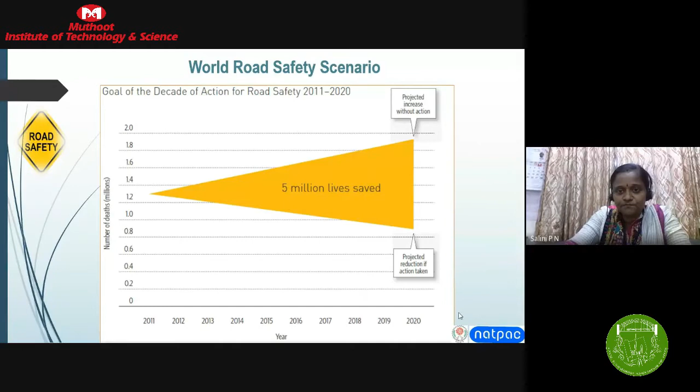The safe system approach is a new idea conceived by global practitioners in the field of road safety, and 2011 to 2020 has been considered the decade of action for road safety. The 5 pillars for the safe system approach have been identified as road safety management, building safer roads, building safer vehicles, safe user behavior, and improving post-crash care. So all intervention strategies worldwide have been structured to achieve improvements in these 5 areas, identified as the 5 pillars for achieving a safe system approach.

About 2.3% of all deaths happening worldwide are due to road traffic crashes. Most of the lives lost are in the age group of 15 to 29, so youngsters are losing their lives on our roads. Road traffic injuries were the 9th cause of total deaths earlier, but it has now become the 3rd leading cause, showing the alarming nature of this serious concern.

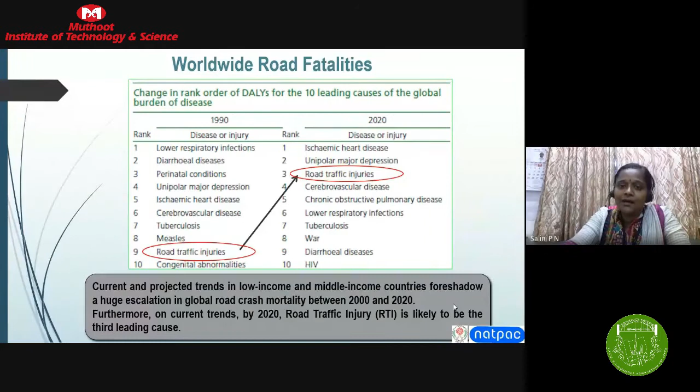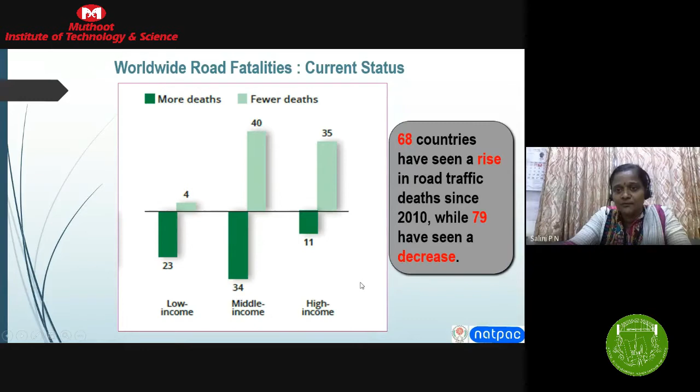It is found that the loss of lives happening on our roads is even more than the loss of life due to COVID. When we look at the statistics, it's found that almost 68 countries have seen a rise in road traffic deaths, while about 79 countries have seen some decrease because of the safe system approach they have adopted and the interventions they have taken in road engineering. About 1.35 million people are getting killed each year on our roads.

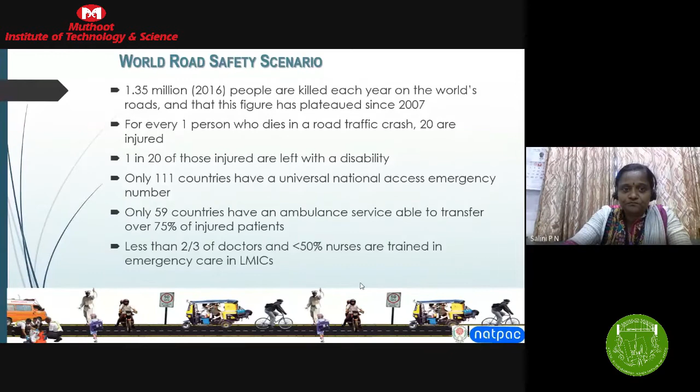Overspeeding is found to be one of the major reasons for the cause of crashes and deaths on our roads.

Coming to the Indian scenario, about 8 to 10% of global road deaths happen in India, and the vehicle population is increasing by almost 20% every year. So Indian cities are getting overwhelmed with the number of vehicles increasing every year.

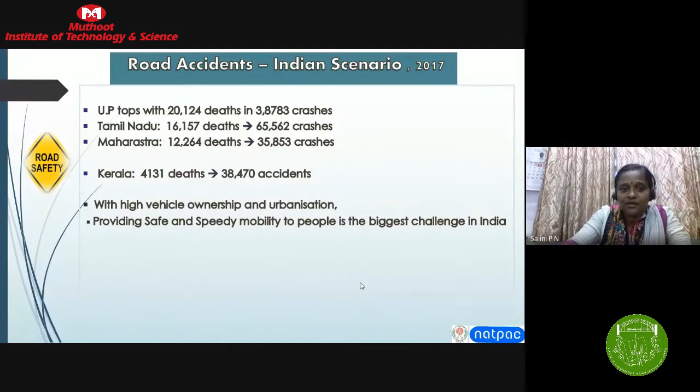When coming to Kerala, more than 4,000 deaths are happening in almost 38,470 accidents every year. The death toll is more than 4,000. Tamil Nadu and Kerala are among the two states in India which have a comparable number of deaths with other developed countries.

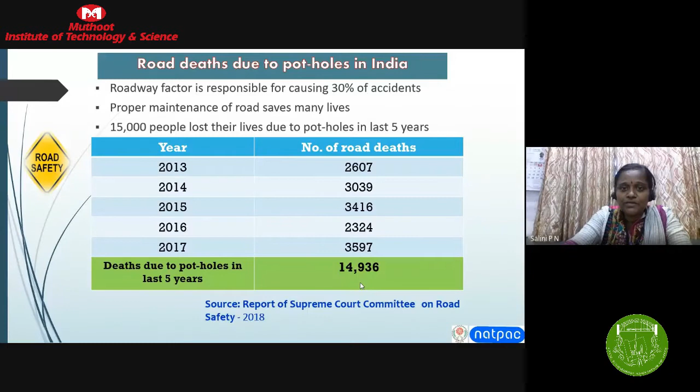The source report submitted to the Supreme Court shows that potholes are causing almost 30% of accidents. The roadway factor responsible is potholes. This implies the role of road engineering, safe road engineering, in reducing the number of accidents as well as the loss of life on roads.

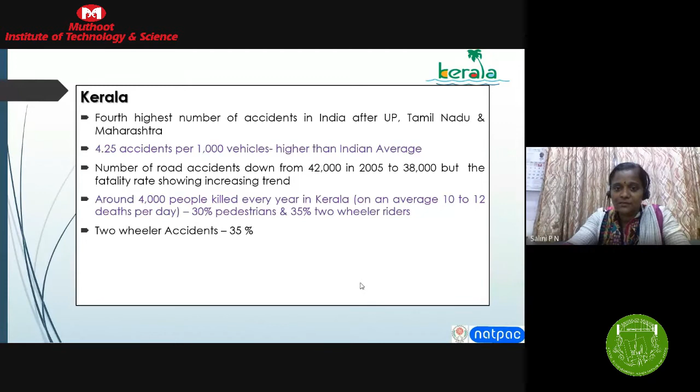About 4.25 accidents per 1,000 vehicles are happening in Kerala, that is about 10 to 12 deaths per day. This is the statistic on which it is reported that about 10 to 12 deaths happen per day. Out of the persons killed, about 30% are pedestrians and 35% are two-wheeler riders.

So they are the vulnerable road users who become victims of most accidents - the two-wheelers and pedestrians. These statistics also show that two-wheelers and pedestrians are the most vulnerable category of road users on our roads, becoming victims of most road accidents, with the most severe fatality rate happening to them.

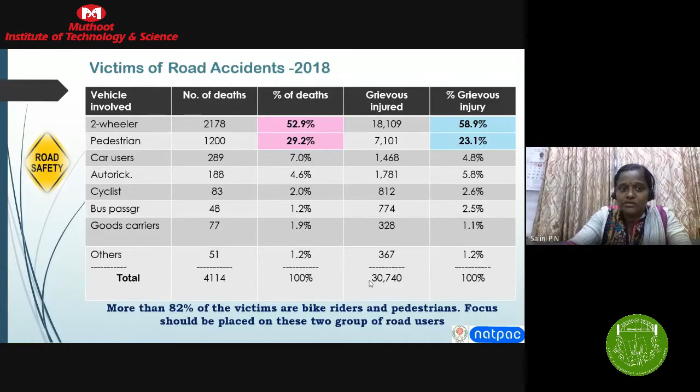More than 82% of the victims are bike riders and pedestrians. This statistic on vehicles involved and corresponding number of deaths shows that grievous injury happens mostly to two-wheelers and pedestrians. This pie chart again shows the severity or extent of fatality caused to two-wheeler riders and pedestrians.

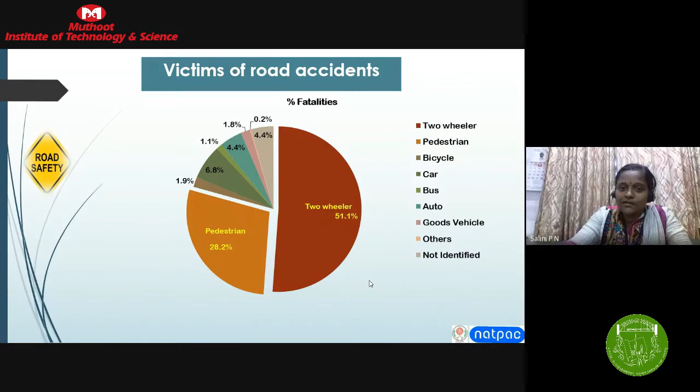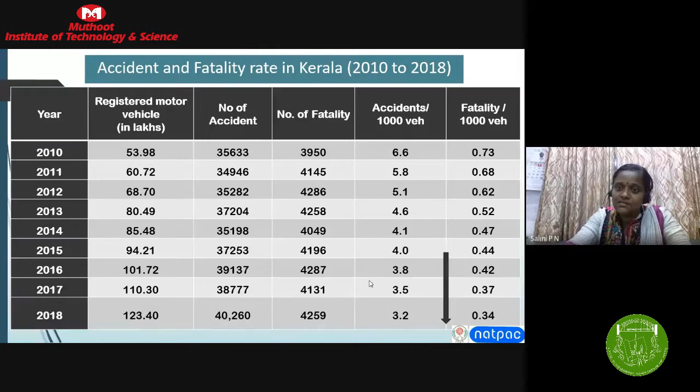Around 95% of road crashes involve some element of human error. Although educating road users can reduce the number of road crashes that occur, human error cannot be eradicated. So there is always a chance for accidents to happen.

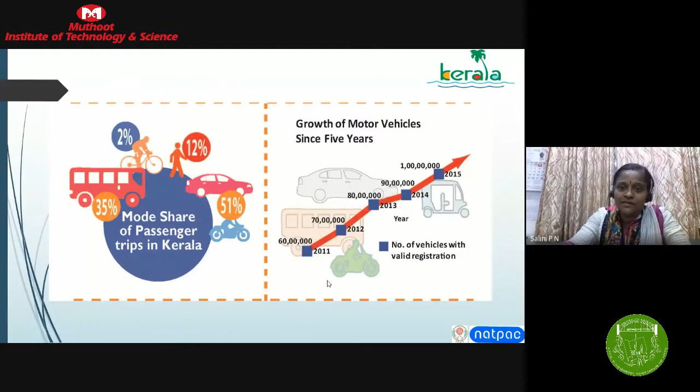Now this is the approach we are taking: to consider and build forgiving roads, because humans always make mistakes that cannot be avoided, but we can make safe engineering in our roads so that mistakes made by humans or road users will be taken care of, or at least the extent of fatality will be lessened.

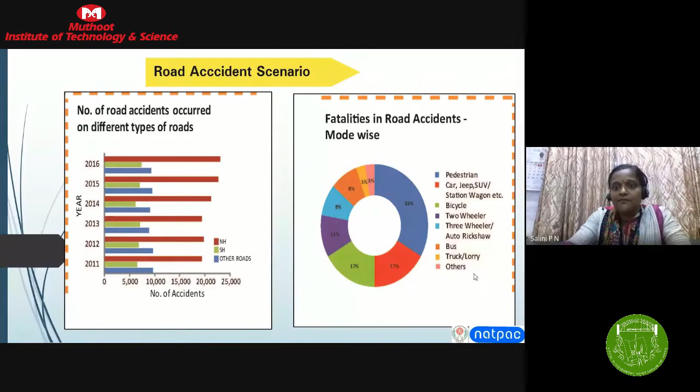The growth of motor vehicles over the years shows a steepening curve, as does the accident scenario. The number of accidents occurred on different types of roads - national highway, state highway, and other roads - are shown here. The accident rate on national highways is higher, and vehicle category-wise fatalities on roads are also shown in the pie chart.

So altogether, all these statistics show there is an alarming rate of accidents happening in Kerala, causing serious concern on our roads. The road-wise accidents show 25% on national highways and 20% on state highways.

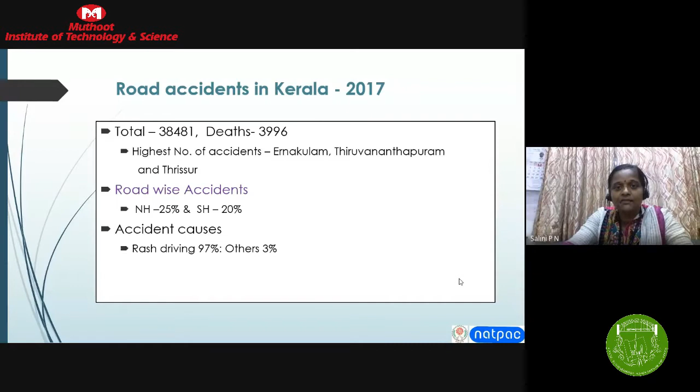So there is an urgent need for all practicing engineers, academicians, and researchers to focus on safe road engineering so that the number of deaths happening on our roads can be lessened.

So these 5 pillars of road safety were identified so that we can make more scientific and judicious engineering on our roads: road safety management, better infrastructure, safe vehicles, road user behavior - better behavior of road users on the road - and post-crash care or trauma care.

And recently, when 2011 to 2020 was declared as the road safety decade, the new idea or concept has been the Vision Zero approach.

Globally, all countries have taken up a decision to bring the number of accidents to zero by 2030. That is the Vision Zero approach. It is stated that it can never be ethically acceptable that people are killed or seriously injured when moving within the road transport system.

So practicing engineers or the highway fraternity have to bring an element of safety engineering onto our roads, so that roads are built as forgiving roads, even if road users make mistakes, that will be taken care of.

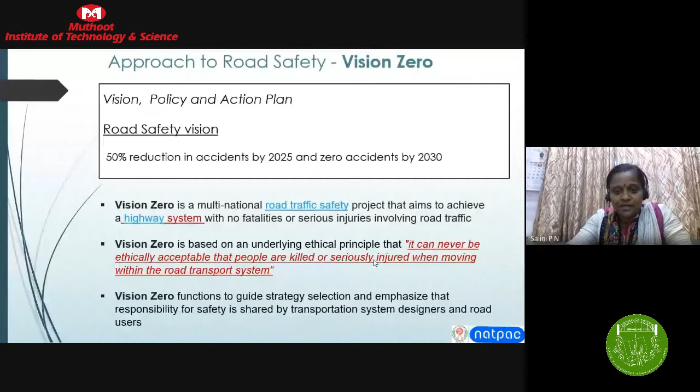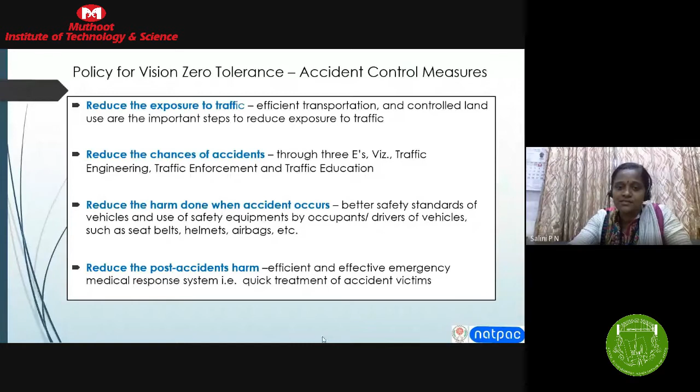Accident control measures should be oriented towards reducing the exposure to traffic, reducing the chances of accidents, and reducing the harm done when an accident occurs. Accidents are always unpredictable - we cannot predict whether an accident will happen or not, but we can reduce the harm done and the post-accident harm through better infrastructure for trauma care.

So ensuring safer road infrastructure has been the first call while taking an action policy approach on road safety engineering. Safe road engineering is of vital importance in achieving the Vision Zero concept by 2030.

These were identified to be the key action areas of road safety policy: safe road engineering, better education, better enforcement, better emergency care. Altogether these can be categorized under the 5 E's - engineering, education, emergency care, evaluation, and enforcement is also of vital importance. These were identified to be the 5 E's when formulating an action plan for safer road engineering.

Here, engineering is of vital importance. Out of these 5 E's, engineering is of vital importance, where as engineers we can step in and keep a focus so that better roads are being built.

And now, from now on, our approach should be a safe system approach. That is, mistakes are inevitable - road users may always make mistakes, but deaths or serious injuries from road crashes can be avoided by better or safe road engineering.

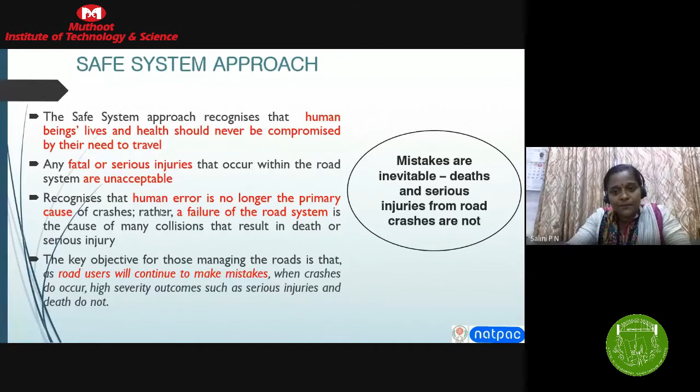The safe system approach principles: people make mistakes, people are vulnerable, we need to share our responsibilities, and we need to strengthen all parts of the system. These are the key concepts upon which we have to build our strategy of action plan.

Now, the role of engineers and transportation professionals is in considering safety in planning and design of new roads. It is important that we bring in an element of safety in every engineering aspect or design of roads, improve safety on existing roads, identify hazardous locations, and deploy safety countermeasures so that all mistakes will be taken care of.

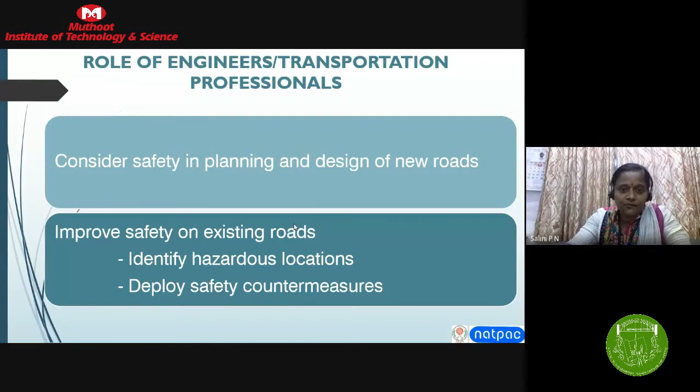And that highlights this - this gave an overview on the road safety scenario globally, as well as on the national level and the state level. Let me pass on to our topic, that is the road safety audit.

Based on the vital importance of bringing an element of safety in road engineering, the concept of road safety auditing has been developed. The history shows that in the late 1980s, when the road safety engineering team in a county in England began to question the number of newly built roads appearing in the county's black spot list, with support from a county surveyor, a policy was developed requiring all new roads designed in the county to be checked and approved for safety.

That is the history or origin of the road safety auditing concept. All the newly built roads were coming onto the county's black spot list, so there was a call for bringing in an element of safety and auditing the safety element of newly built roads. There came the origin of road safety auditing - the checking process became formalized as road safety audit, and that team became the first road safety audit team.

The road safety situation in India is very alarming - in economic terms, the cost to the nation is an estimated 3% of GDP, and the majority of fatalities are happening in the age group of 18 to 45, meaning youngsters are losing their lives on the roads. This calls for coordinated action by all key stakeholders, and there comes the relevance of road safety audit on our roads, which is a critical step in that direction.

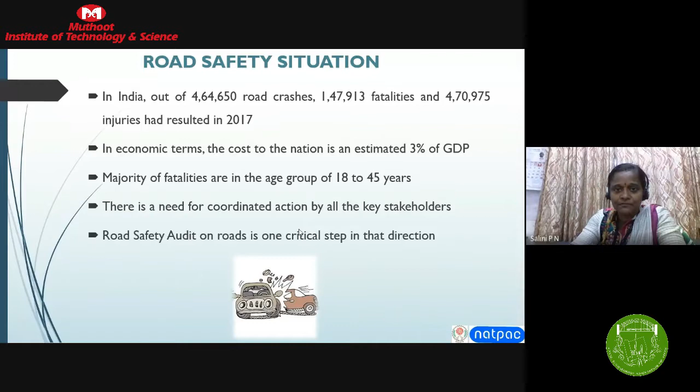The category of people involved in the roads or the road crashes are the road user, vehicle, and also the road system or the road environment. So what might be the solution?

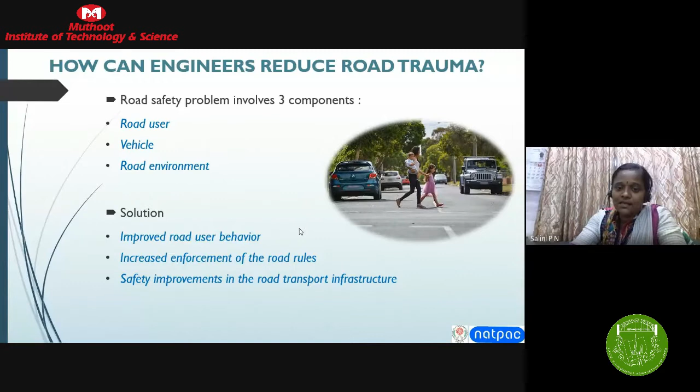It should have an improved road user behavior. The system should have an improved road user behavior, for which education or training is a must, an increased enforcement of the road rules, and safety improvements in the road transport infrastructure. And there lies the importance of road engineering, safe road engineering.

And as we all know, prevention is better than cure. So road safety audit is a process of crash prevention. Road safety can be built into new road projects by making changes at the design stage itself, and risks to the future road users can be minimized.

It is a formal process, not just an informal check. And it is conducted by a team of persons who are independent of the design of the road, or who are independent of that project. And it is conducted by persons with appropriate qualification, training, and experience, and also they should have the proper certification from the IRC or MORTH or the authorities.

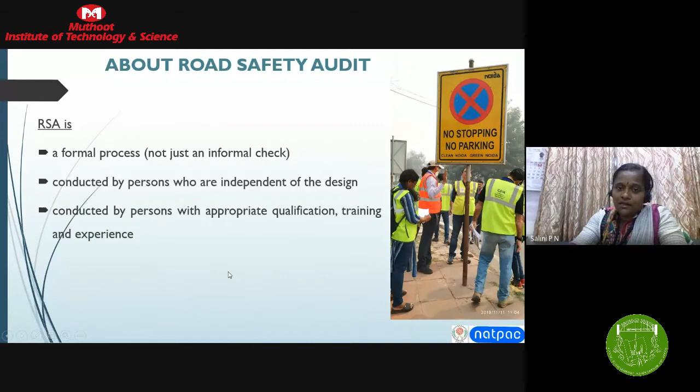Road safety auditing could be defined as a formal, systematic, and detailed examination of a road project by an independent and qualified team of auditors that leads to a report of potential safety concerns in the project. And IRC has published a set of guidelines, the Manual on Road Safety Audit, which is IRC SP 88 2019. That gives the guidelines for conducting a road safety audit.

And about the road safety audit, it is not a check of compliance with standards. It is not just a substitute for regular design checks. And it is not just a crash investigation, it's not an opportunity to redesign a project which needs to be carried out separately. It's not a name for a more detailed site inspection. It's not a way of assessing or rating a project as good or bad.

And a good road safety audit is accomplished when focus is on the road safety issues only. Keep relevant standards and guidelines in mind. Consider the needs of all the road users. That will include the vehicle riders as well as the vulnerable road users. And it should be very thorough and comprehensive. It should be realistic and practical in findings.

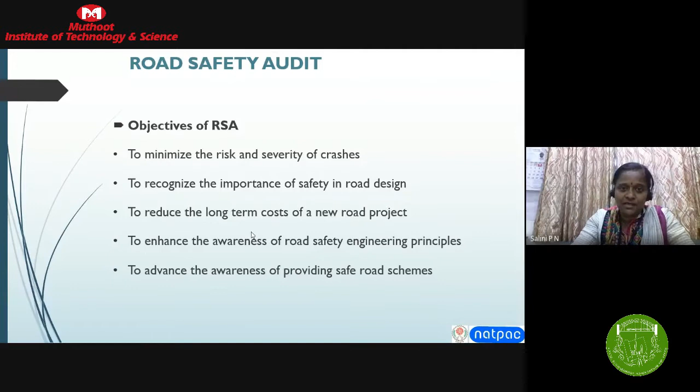And the key steps involved in conducting a road safety audit are: we have to first of all determine that an audit is needed, and the authority or the project manager should select a team leader for the road safety audit team, who then selects the audit team. Provide information about the project to the team leader, then hold a commencement meeting which gives the outline of the project and discusses the audit ahead.

And then the drawings and design reports should be provided by a designer to the road safety audit team. The team should inspect the site both during the daytime as well as the nighttime. A detailed site investigation has to be carried out. Prepare the audit report and submit to the project manager. Hold a completion meeting to discuss the key safety issues and to clarify the outstanding matters.

Provide response on the audit report referring to each and every audit recommendation. The response on the audit report should be given by the client together with the designer, and it should finally be brought to implementation based on discussions.

What projects are to be road safety audited? Any road project on a high-speed road. It is desirable that all the roads get audited from the safety point of view. But there are constraints on the resources that we can share.

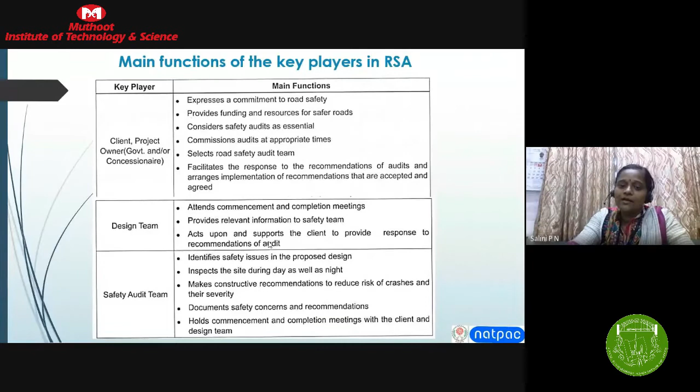And the safety audit team is quite independent of that project. And they will be very qualified people having expertise in the field of road safety engineering. They will identify the safety issues in the proposed design, inspect the site during day and night time as well, make constructive recommendations to reduce the risk of crashes and the severity. They will document the safety concerns and will provide the recommendations or the modifications to be brought about. They will hold commencement and completion meetings with the client and design team.

And this road safety auditing is being done in stages. So the main 5 stages involved in road safety auditing are planning or feasibility stage, then the design stage, construction stage, pre-opening stage, and existing stage. That is, road safety auditing has to be done in the planning stage. It also has to be done at the design stage, and again during the construction stage also. Just at the completion of the project, before the commissioning itself, a pre-opening stage audit has to be done. And on the roads which are in operation, that is in the existing operation stage also, periodically this auditing could be done.

The suggested stages of road safety auditing. All these guidelines are given in IRC SP 88 2019, which is the manual of road safety auditing. And it prioritizes the kind of highways based on their functional classification, which stages of auditing have to be carried out on which roads. So when it comes to superior kinds of roads like expressways and national highways, most of the stages of auditing are inevitable. On expressways, the safety auditing has to be done in all the stages like planning, design, construction, pre-opening. And on the national highways, in the planning stage it is optional, but in all other stages the road safety auditing has to be done.

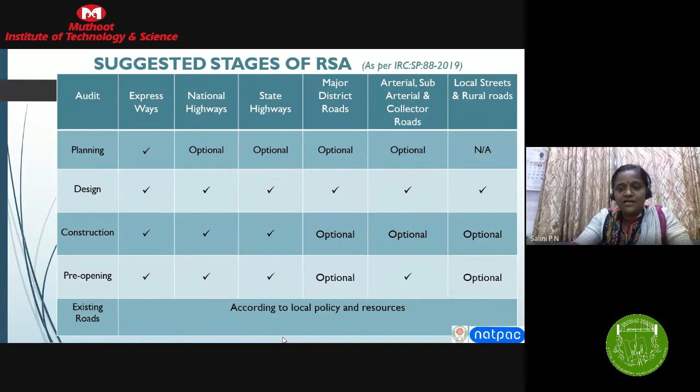So the planning and feasibility stage auditing. Before the commencement of every highway project, we all know that there is a planning stage where the alignment is being fixed, the route of the highway is being fixed, and also the various preliminary things in the design like its horizontal or vertical alignment, what should be the cross section of the highway, and wherever the intersections are coming, what is the kind of layout for the intersection. All these decisions regarding the preliminary design are taken at the planning stage.

And at that stage, an auditing will help in reducing the cost and time loss associated with the changes that may otherwise be brought about during later audits. If the right kind of safety audit is done at the planning stage, a lot of cost or time can be saved, which otherwise may be incurred in case some safety threats occur in later stages. So for superior kinds of projects, at the planning stage also road safety auditing has become mandatory. It will audit the design standards adopted, route choice, continuity with the existing adjacent network, horizontal and vertical alignment, cross sections, interchange and intersection layout.

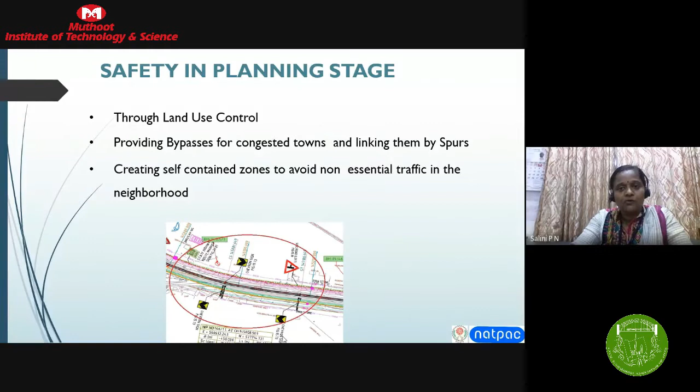It will have a decision on the through land use control. It will check the decisions and providing bypasses for congested towns and linking them by spurs, then creating self-contained zones to avoid non-essential traffic in the neighborhood. So these are some of the concerns being addressed during the planning stage.

That is, the highway alignment should pass through which all areas. It will not be desirable if the highway alignment passes through a busy town area. So a bypass is being thought of. Major arteries and expressways should bypass major towns, which should be connected by spurs. And there should be clear zones identified for linear land use control.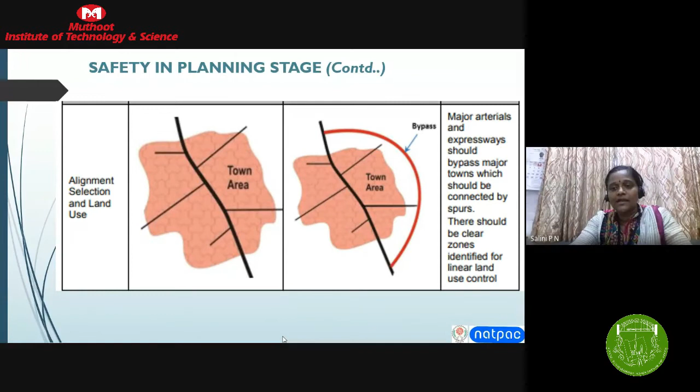In the design stage, this stage occurs on completion of the detailed road design. That is, the final DPR is prepared during the stage, but before the preparation of contract documents, that is, before bidding the contract documents, a finalization has to be done at the design stage. During the process, there has to be a safety auditing so that every safety concern is being addressed properly.

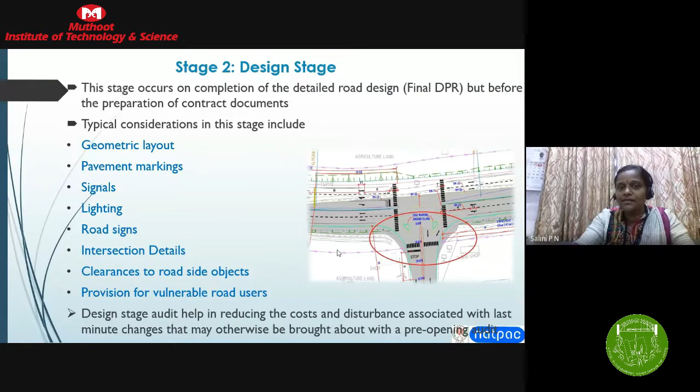It is very crucial because once the contract is bid or once the project is awarded to a contractor, it will be difficult to make the changes in the design. So it is better that all the safety concerns are addressed during the design audit itself, so that no element of risk is left unaddressed on the roads, and the safety element is brought in the design. So design stage auditing is very important, and it is becoming mandatory in all the highway projects.

And care is being taken to look into every detailed aspect of design, like the geometric layouts, pavement markings, signals, road signs, etc. Clearances to roadside objects, and also the vulnerable road users are the most neglected road users, and an audit team should also take into consideration every facility given for the vulnerable road users, whether they are provided as desired.

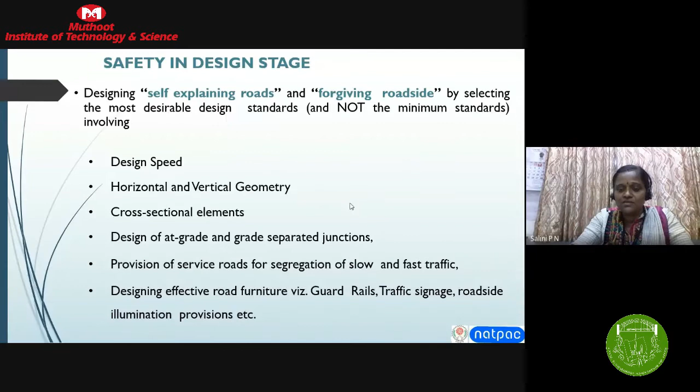The safety in design stage is focusing on designing the roads as self-explaining roads and forgiving roadsides by selecting the most desirable design standard, not only the minimum standard, taking care to bring in the most desirable facility in consideration of aspects like design speed, horizontal and vertical geometry, cross-sectional elements, design of at-grade and grade separated junctions, provision of service roads for segregation of slow and fast traffic, designing effective road furniture, etc.

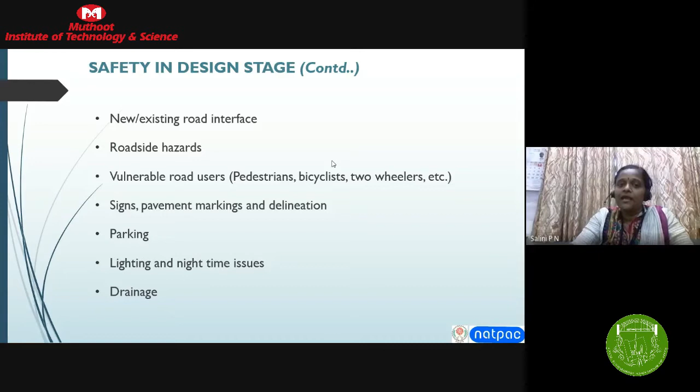So the roadside hazards, also the parking facilities and the nighttime lighting, drainage facilities, every detail of the road engineering has to be taken care of, and the safety concerns have to be addressed. Now coming to the safety in the design stage, I will just flash through some of the safety elements, because these are all very important factors which have to be properly addressed.

And it takes time to completely deal with these topics, but now I will just go through some of the important aspects of geometric design, or the areas we have to focus on while doing the road safety auditing during the design stage. That is horizontal geometry. Consistency of horizontal geometry, avoiding monotonous straight lines or abrupt change of speed is very essential. And adequate offset distance from the natural roadside features is to be provided. Offset distance has to be adequate, and the vertical geometry is to be taken care of.

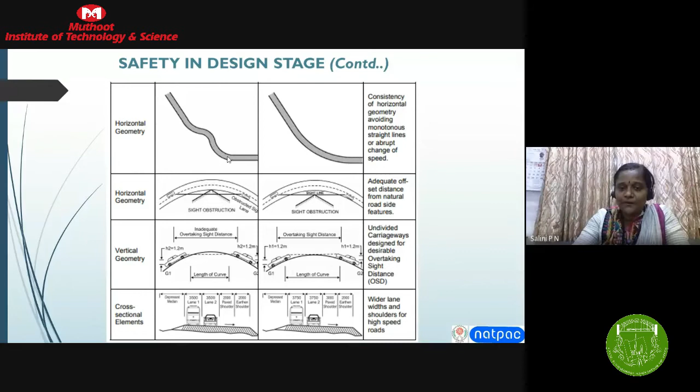Undivided carriageways are designed for desirable overtaking sight distance. The overtaking sight distance has to be proper, otherwise there may be chances of crashes due to unsafe overtaking practices. And the cross-sectional elements should be properly given, wider lane widths and shoulders for high speed roads.

The extra widening provided at the curves is very important. These are all the cross-sectional elements to be taken care of, and IRC guidelines are being provided for the desirable standards of geometric design. All the cross-sectional elements like the extra widening to be provided, or the recoverable slopes for out-of-control vehicles, what is the slope to be given, what is the median and the kind of median to be provided on highways. Guidelines are available from IRC for all these design aspects, and we should conform to all those guidelines while designing.

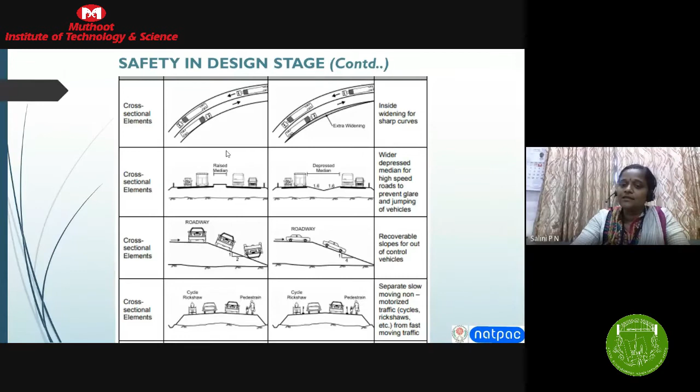And if it is not being done, a road safety audit team should pinpoint all such concerns and should give recommendations, site-specific recommendations to the authority or the design engineer so that they can make the modifications at the design stage itself. And wherever it is a busy highway, separate lanes have to be provided for segregating the slow-moving non-motorized traffic from the fast-moving traffic.

The entry exit at the intersections. Intersections are the critical points in every highway alignment or highway network. So the entry exit in the junctions are very important. Separate intersection designs are always needed for facilitating the safe and smooth maneuver of vehicles at the intersections. The provision of slip lanes or acceleration or deceleration lanes are all very important. And the passenger transit, separate lay-by for buses, taxis, etc. to segregate them from the vulnerable road users is important.

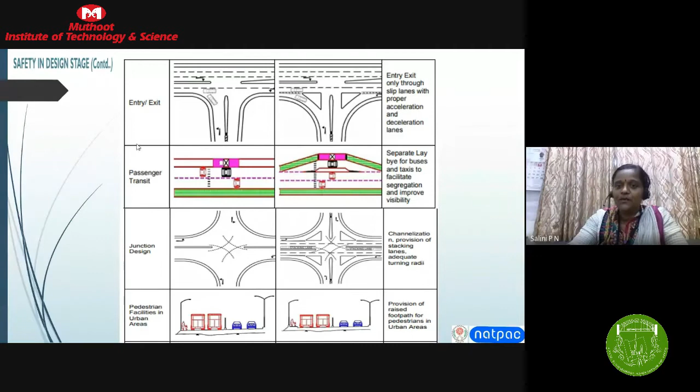Junction design or the pedestrian facilities, all these have to be scrutinized by the road safety audit team, and they should give desirable modifications or recommendations wherever there exists a safety concern in the design. Also, nowadays, every highway is being built with specific attention to the differently abled people also. So wherever such demands are there, there should be facilities to aid them also.

And the barriers provided on the roadside should be given in a safe manner. Providing a barrier by itself will not take care of the safety, but it has to be provided to the standard height and the standard fixture provisions should be provided. Otherwise, it will again result in fatalities when a crash happens. The height of the crash barrier is very important, and the end treatment to be given at the crash barrier is very important, and guidelines are given in IRC for each of these specific details, but normally some of the practicing engineers are not conforming to the guidelines provided, and this causes severity of fatalities when an accident happens.

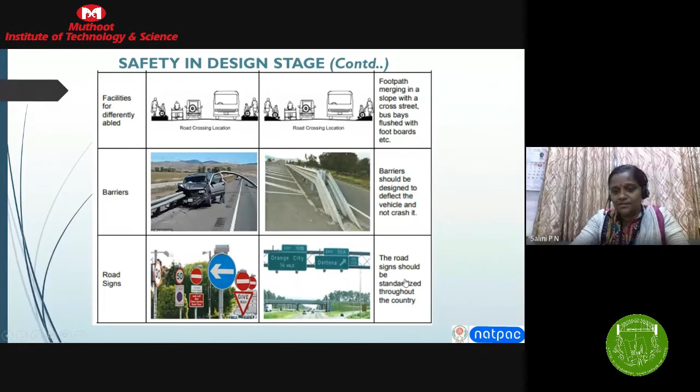The road signs have to be given in the proper manner. Here, this figure shows a crowded provision of road signs. This is not desirable. This will only confuse the road user. The road signs also have to be provided as per the guidelines. The IRC provision is there. IRC 67 provides for all the specifications on the signs, IRC 35 for the markings. So all those details have to be taken care of. And the engineering aspects of safe road infrastructure thus involve all these, that is the planning stage and design stage.

And now coming to the construction stage, a safe road environment should always be a warning type. It should inform the road user of all the hazards that he is likely to encounter on the road. It should guide the road user properly. It should control the road user's passage through conflict points and sections. And the highway should always be of forgiving nature. That is, even if the road user goes errant or some inappropriate behavior happens from a road user, the highway should be built in such a way that it should take care of the risk involved. So these are the principles to be taken care of. The highway should be designed in such a manner that it should properly warn, inform, guide, control, and forgive a road user.

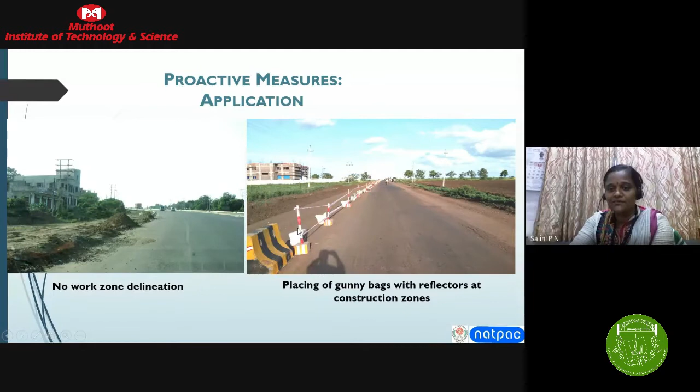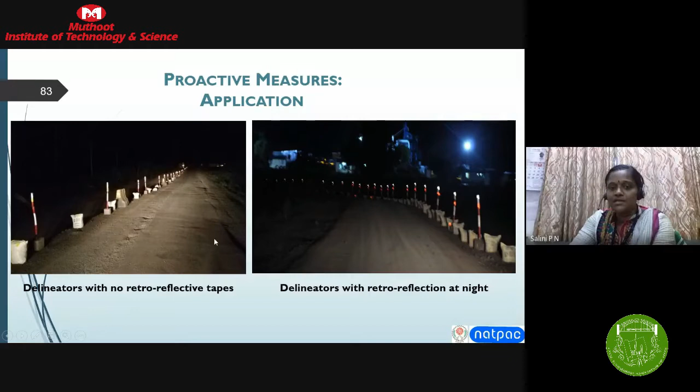And these are some of the proactive measures. Applications. No work zone delineation is given. Here, during the construction stage audit, no work zone delineation is given, but here the work zone is being clearly demarcated with the gunny bags with reflectors. The reflectors should also be provided so that nighttime visibility is there. Here, the delineators with no retro-reflective tapes, but here the delineators provided are with retro reflection. So the road safety auditor should pinpoint such safety threats on the road.

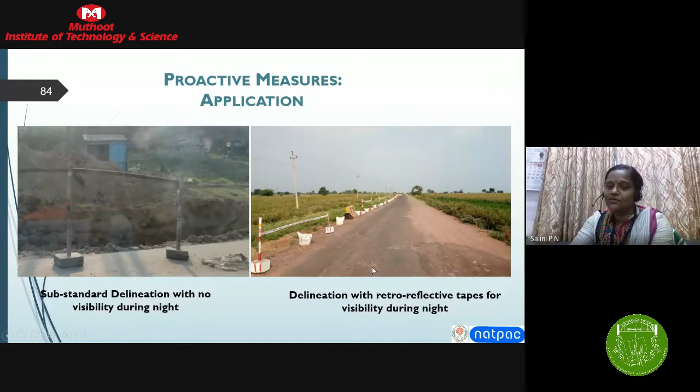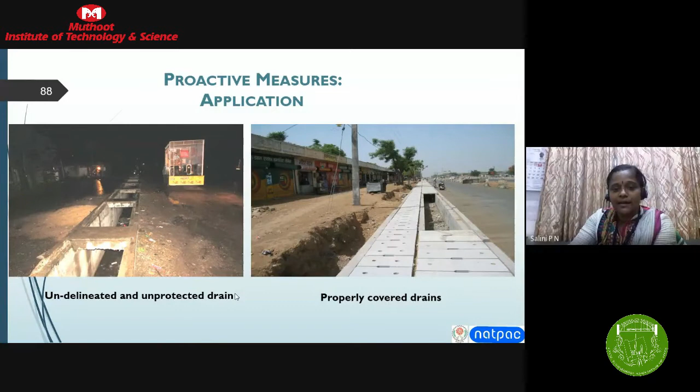Undelineated and unprotected drain, here it is properly covered. So these are the kind of measures being taken to properly safeguard the threats on the roads.

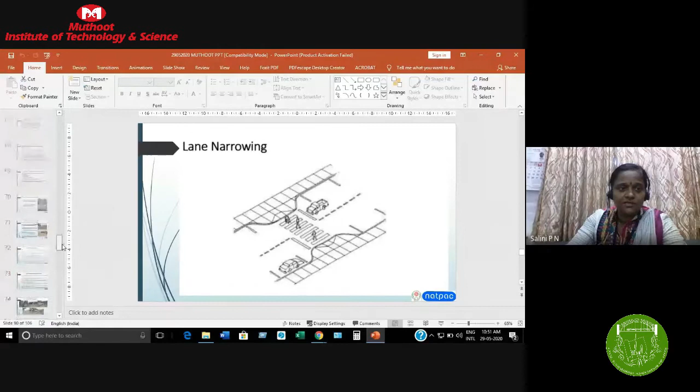Now coming to the traffic calming measures, the signs, markings and gates. The signs, markings and gates should be provided. I think I have skipped some of the slides on the construction stage. That is the stage 3, construction stage.

Construction stage is the audit to be provided at the construction stage, where it takes place during the construction of roadworks. That is, when construction is happening on the road, the traffic also will be plying over the road. So the traffic has to be properly warned that there is some construction happening on the road. Otherwise, it will again become a source of danger for the road users. So the typical issues have to be examined during the construction stage.

They are the provision for pedestrian safety, advanced warning zones, adequate transition zone length, worker safety, effective number of reflective signs, safe delineation, credible speed limit, temporary crash barriers, lighting and diversion. That is, whenever a construction site is there, it has to be properly demarcated from the road users so that they never get into the construction site, or that doesn't become a chance for a crash or an accident.

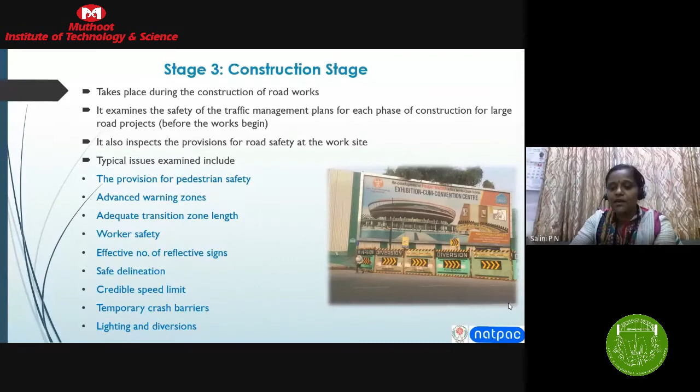The objective of construction stage road safety auditing is it requires proper construction safety to avoid the risk of accident at the site of work. Proper signage and safety measures are required at the site. Delineation of the work zone is warranted. IRC SP 55/2014 has provided the safety measures to be adopted at the work zones for standard operations.

IRC SP 88/2019 manual on road safety audit also gives some of the guidelines for the facilities to be provided or the warning system to be provided at the construction sites. So a safety audit at this construction stage will address the adherence to the manual for the work. And the guiding principles are: warn the road user clearly and sufficiently far in advance, provide safe and clearly marked lanes for guiding the road users, provide safe and clearly marked buffer and work zones.

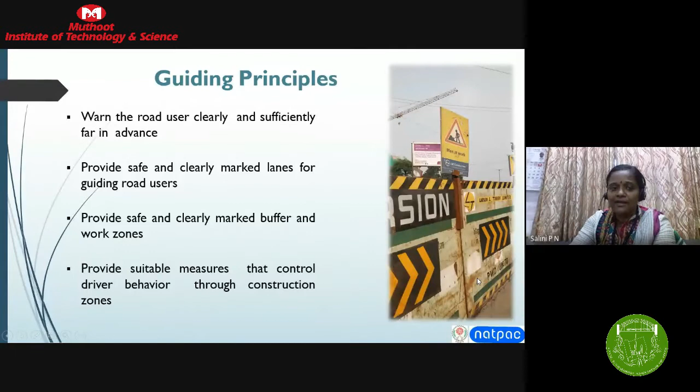Here you can see that in this picture, the diversion signboards are given. Proper warning is given that men are at work in the site, and a diversion is being given with barricades. The components of traffic control zone. The traffic control zone at a construction site can be divided into an advanced warning zone, approach transition zone, working zone, and terminal transition zone.

So a road safety auditor has to see whether the facilities or the warning system provided at a construction site is conforming to these guidelines, whether there is an advanced warning zone, whether there are any signs provided in the advanced warning zone. He will have to check whether there is an approach transition provided, and also he will have to see the kind of signboards given at the working zone, whether it properly demarcates the construction site, and also the terminal transition zone. So as shown in the picture, we can clearly demarcate a construction site from the rest of the road traffic by properly giving the road signs and delineation facilities.

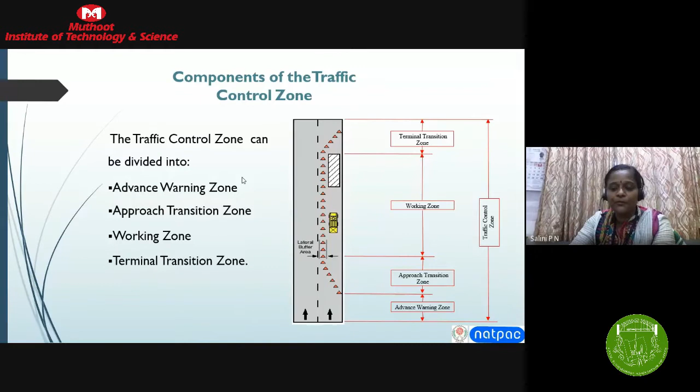And these are the 4 zones to be provided at a construction site by an engineer. And the audit team has to check whether it is properly given, or they will have to provide recommendations to make these modifications. So this is the kind of zone demarcation at a construction site.

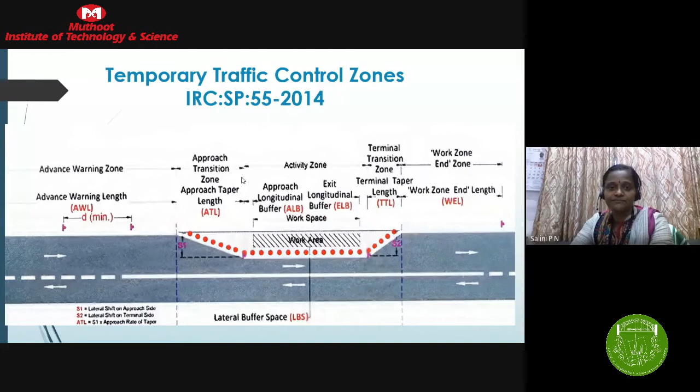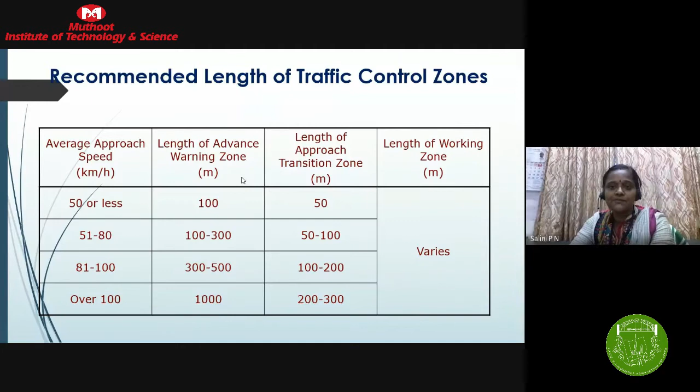You can see the work area, and before the commencement of the work area, there has to be a warning length where the signboards have to be provided to properly warn the road users that there is a work area ahead. Then there is a transition zone. Then there is activity zone. Then the terminal transition zone. Then at the end, there is a work zone end length. So IRC SP55 gives the recommended length to be provided at each of these control zones. You can refer to IRC SP55 for getting the standard length to be provided at these zones.

So these are the different work zone components. The warning zone is the section of the road in which road users are warned in advance about the presence of a work zone. The transition zone is where road traffic is redirected from their normal path to a laterally shifted path. The activity zone is the workspace where the activity is carried out, which has to be properly delineated. The transition zone redirects traffic from the deviated construction path back to the normal path.

A terminal transition zone also has to be provided to redirect the traffic to the normal path. Then the work zone end, where we have to properly warn or inform road users that the work zone has ended and they can resume their normal path.

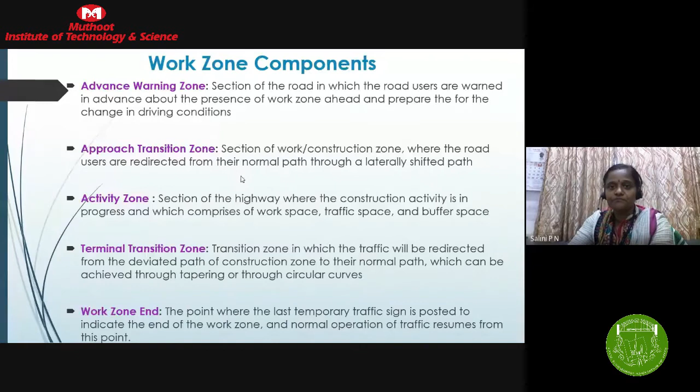A work zone traffic management plan has to be brought about to facilitate the passage of road users. The roadway geometry, roadside features, or traffic control devices have to be properly given so that road users will be properly guided.

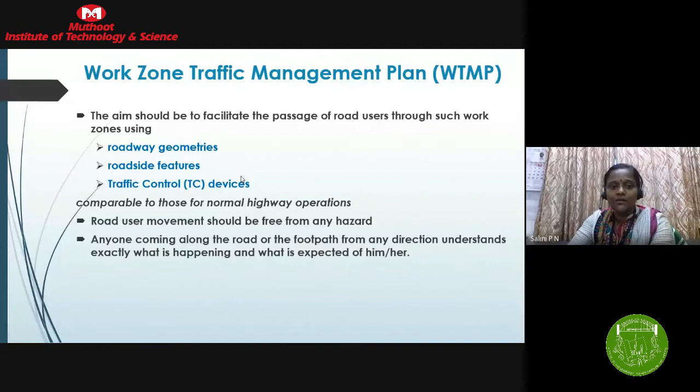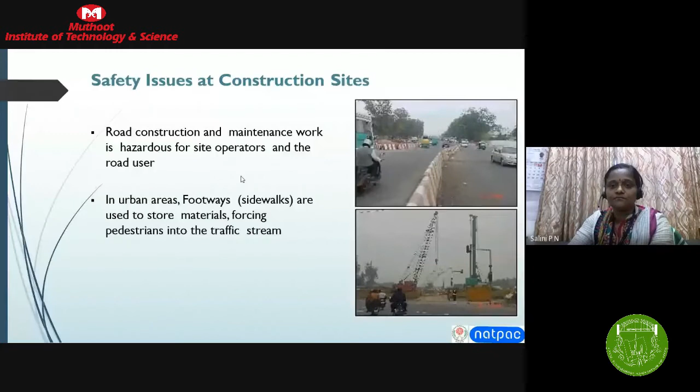These are some of the safety issues at the construction site. Narrow traffic lanes are created at a construction site, and the lane width will be constricted. Only narrow lanes will exist, so workers will have to reduce speed, and traffic calming measures have to be provided for that.

The workforce, the people working at the site, are also at great risk, so they also have to be taken care of. Many accidents in construction zones take place due to increased strain on the driver, so the driver has to be properly warned and proper traffic calming measures given so that much strain is not brought on the driver.

Road construction and maintenance work is hazardous, and vulnerable road users have to be taken care of. Separate facilities should be provided for the continuous movement of pedestrians.

Often we see on our roads that footpaths are being encroached upon by other sections of road users. Even two-wheelers ride on the footpath, putting pedestrians at risk. So the pedestrian footpath should always be devoid of any such threats or hazards, and facilities for them should be taken care of.

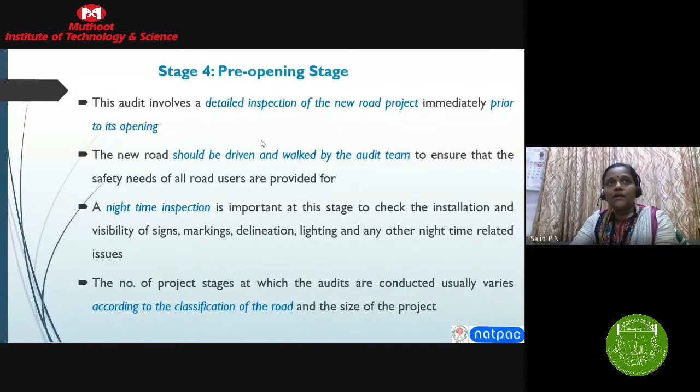The number of project stages at which audits are conducted usually varies according to the classification of the road and the size of the project. Depending upon the priority or functional classification of the road, the authority or project manager can decide which stages of road safety auditing are required or necessary in that particular project.

So the safety audit of existing roads - that is different from what we have told about new road projects. When it comes to existing roads, it is already designed, already built, and in operation. So what kind of auditing is required on existing roads which are in operation?

The audit aims to ensure that the safety features of the road are compatible with the functional classification of the road. Even if the design was done properly during construction, and even if all safety elements were in proper orientation during commissioning of the project, over time some safety threats might have come on the road. So auditing at this stage on existing roads is also necessary, because it can identify any feature that may develop over time into a safety issue.

For example, a tree blocking the sight lines at an intersection. The safety issues found in this audit should be readily addressed through simple and low-cost maintenance practices. That is, the trees or any other roadside hazards which are protruding onto the road could be trimmed off. Signboards sometimes will not be visible, and that could be pinpointed.

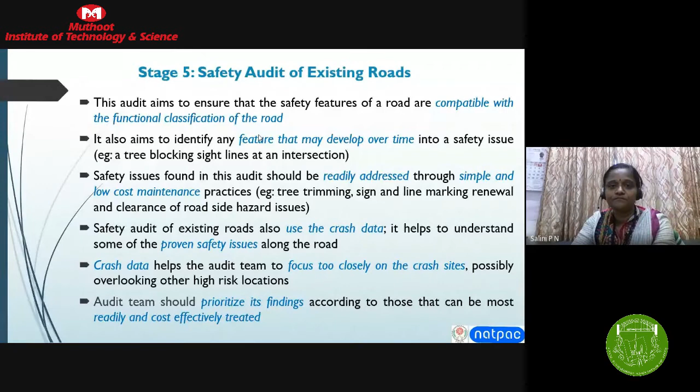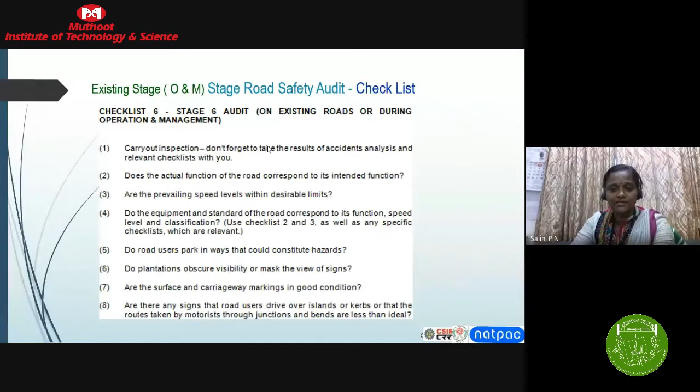So these are some of the provisions given in the checklist, which have to be properly checked and addressed by the road safety audit team.

And coming to, these are the different stages of road safety auditing. I have gone through and given an introduction to each of the 5 stages of road safety auditing, but there are a lot of things to be properly learned in each of these sections. IRC provides guidelines for addressing all these.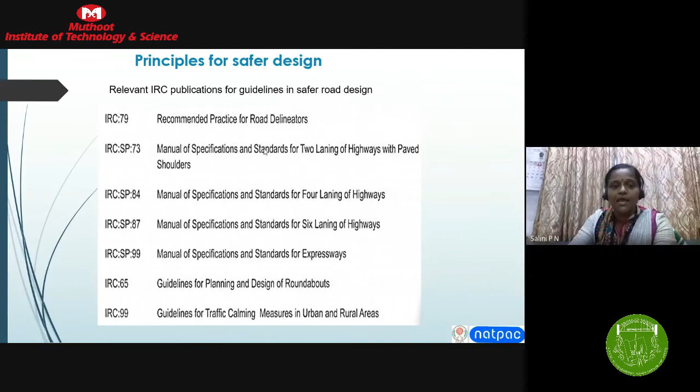These are some of the IRC publications that give the guidelines for the different aspects of road safety design and the elements to be provided, safety elements to be provided on the roads. I'll just share the slides, so you can go through the different IRC provisions that are to be followed while designing a road, or while we check the different design elements of the road.

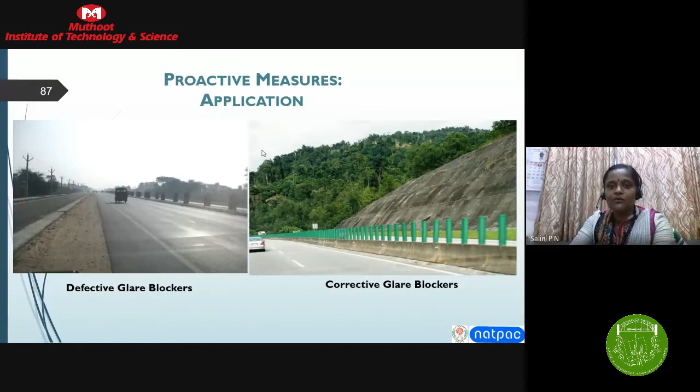These are the slides which I have already shown you. These are some of the proactive measures that could be applied on the road, the traffic calming measures. You know that signboards, markings, or gateway treatment to be given at busy areas, all these are some of the traffic calming measures which will influence the driving behavior. And these are the kind of treatments to be given on the road, so that we can design the road with a forgiving nature, that is, the errors of the road users will be taken care of if we provide the proper safety elements on the roads.

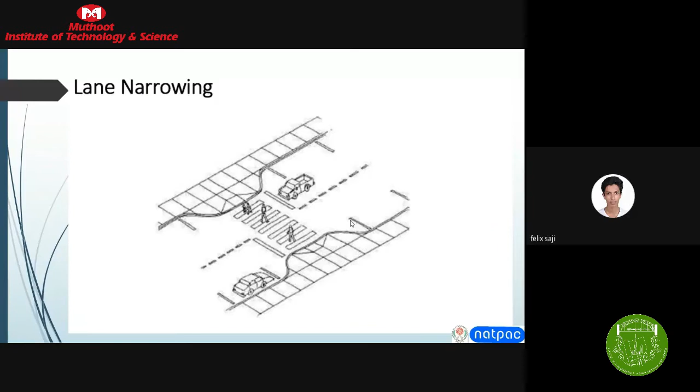And whenever traffic calming is needed or speed reduction is inevitable, in such occasions the principle of lane narrowing can be adopted if it is scientifically advisable. Humps can be provided; humps are also of different types, and that has to be decided based on the site specific requirements.

And these are the kind of other texture paving to be provided on the road, so that it will help in automatically reducing the speed of the vehicles, so that the chances of road user making a mistake is averted. That is the kind of forgiving roads, because we are bringing in some safety elements onto the road, so that the road users or the drivers are compelled to follow the rules, and the chances of making mistakes are averted.

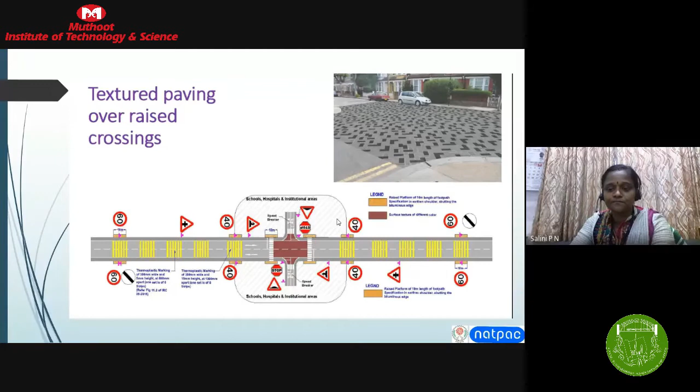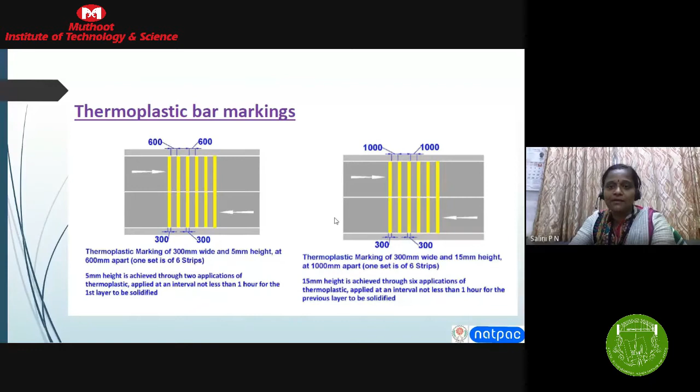Uneven road surface, the thermoplastic bar markings provided on the road, so that the drivers of the vehicles will be alerted and there will be reduction in speed. These are the kind of bumps provided for speed reduction.

The horizontal deflections, wherever in some of the busy activity areas where there is a necessity for reducing the speed, some of the techniques like staggering the path or horizontal deviation of the vehicles on the road can be brought about, and also the chicane on the one lane road in residential streets is advisable in some locations. So an experienced designer or auditor can judge which treatment is required at each site, and that will depend upon the site specific requirements.

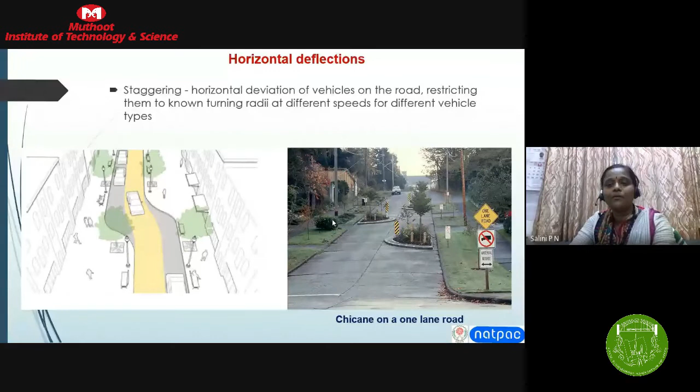Horizontal deflections are possible wherever some channelization has to be given to the traffic plying on the road.

The suggested treatments for mid-block crossings, when there is through traffic and a crossing has to be provided at the mid-block, some treatment has to be given so that the vehicle will be compelled to reduce speed, so they will be channelized and the pedestrians are given a refuge island, and the proper crossing facility with markings. Otherwise, the pedestrians will become vulnerable and will be at great risk. So such treatments have to be given whenever there is a mid-block crossing.

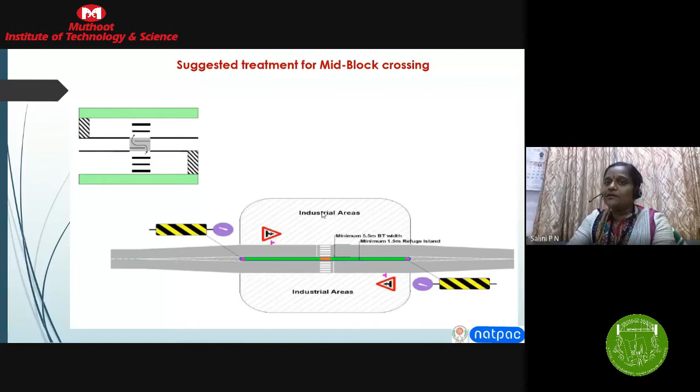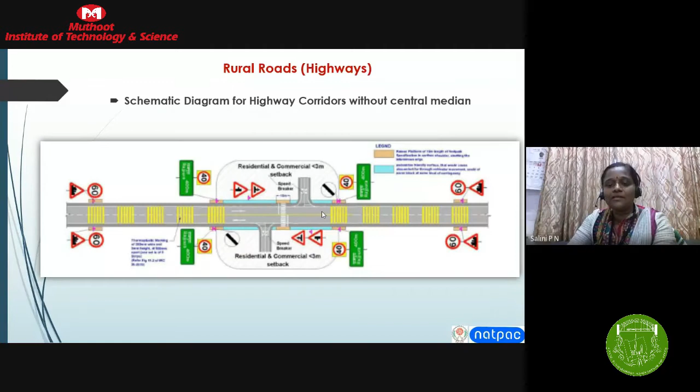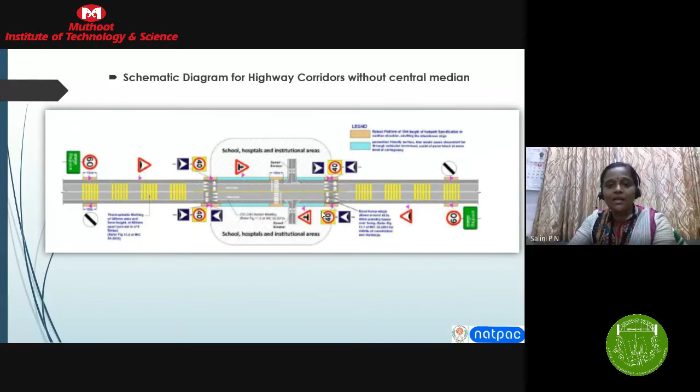Road junctions with raised areas for pedestrians, and this shows the schematic diagram for highway corridors without central median. So depending upon the site or the kind of highways existing, we will have to properly allocate the road safety furniture. All these elements, that is signboards, signals, road markings and other features given on the road, are referred to as road furniture. So the road furniture has to be properly located so that safety is brought into the road engineering.

So at hill roads, wherever there are hairpin bends, the gradient has to be provided as per the guidelines, and also there should be a proper warning system with the help of signboards and markings so that the road user or vehicle rider will be properly guided and channelized, and there will be no threats existing or the hazards will be averted.

The signboards or the object hazard markers or the chevron markers, everything has to be provided as per the guidelines given in IRC specifications. The convex mirrors, wherever there requires a blind curve, all these things have to be provided. So each of the kind of highways or highway locations requires specific treatment.

So a road safety audit team can make a detailed investigation on the highway project. They can go to the site and properly find out the kind of treatment or modification required on the roads, or when it is at the design stage, they can also judge whether the design is properly given or whether modification is required. So there comes the relevance of road safety auditing, which will help in immensely reducing the cost of highway projects, or it will also help in enhancing the safety of the highway projects which are coming up in future.

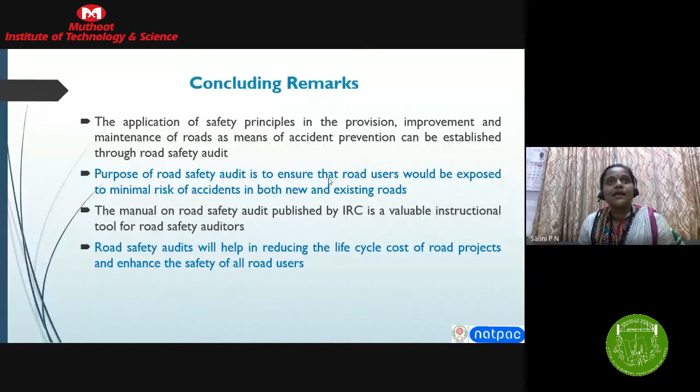So that is a very promising area of highway engineering or transportation engineering, where even the students or the practicing engineers can further focus, so that a lot of promising avenues of profession are there in future, because it is becoming mandatory on all the highway projects.